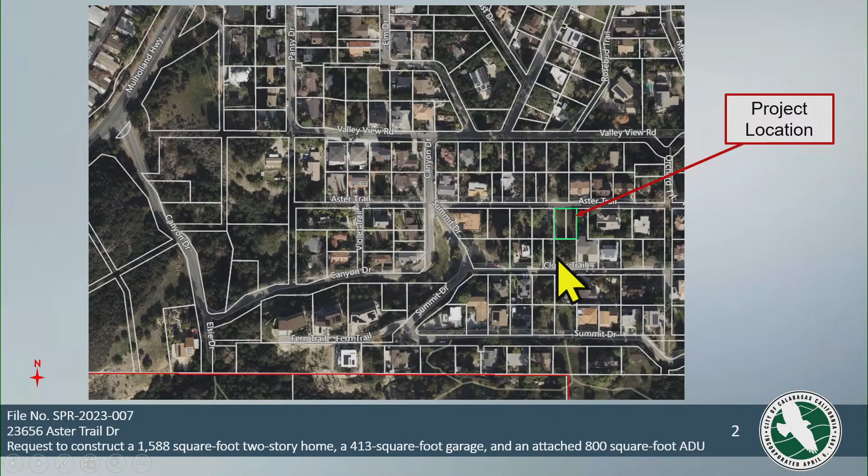The project site is a vacant lot located in the Highlands along Mulholland Highway, as you can see in the overhead image. The site is surrounded to the north, south, east, and west by other single-family residences. I'd also like to point out that there is a vacant lot directly above the project site on Clover Trail. I'll hover over that so you can all see it here. This parcel right above is also a vacant site.

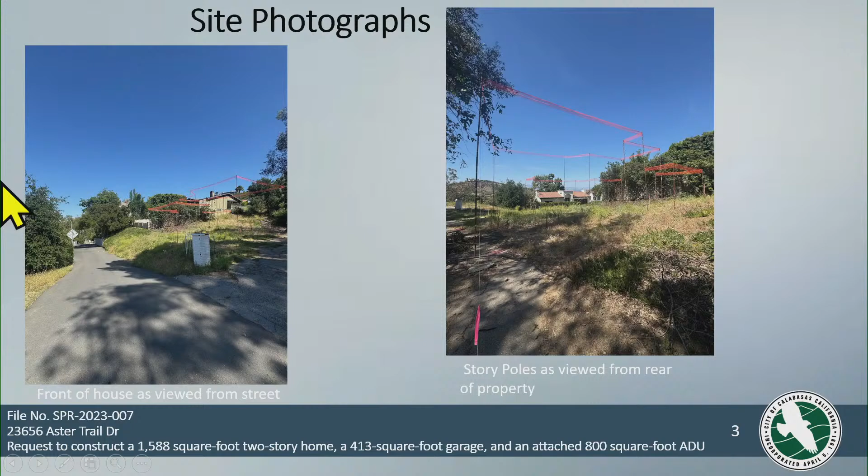The project was deemed complete on October 16th, 2025, and was subsequently noticed for the November 20th Planning Commission hearing, where staff reports and plans were shared with the planning commissioners. At that hearing, the commission opened the public hearing to comments to hear neighbors' concerns about the project and continued the item to a date uncertain so these concerns could be addressed. Over the past few months, the applicant has worked to revise and update the site plan, the grading plans, and the hydrology report that address those concerns raised by both staff and nearby residents.

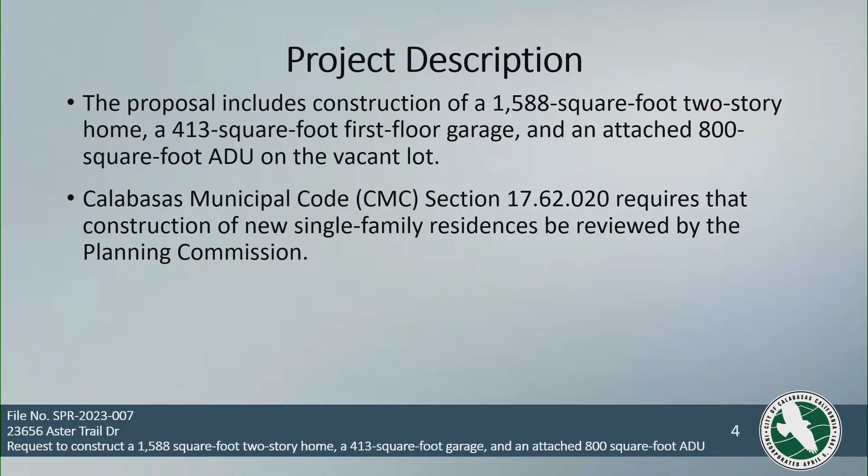As mentioned, the site is a vacant property comprised of 2 separate tax identification parcels. However, staff has confirmed through review of the title report that the subject property is one legal lot. The parcel, as shown earlier, has sloping topography, so there is a low point at the street, and as you go south the hill starts to rise. There are existing drainage features on site.

There is a catch basin that exists on site right now. There is also a drain pipe that will be rerouted, proposed to be done by the applicant. This currently comes from Clover Trail and is basically the drainage along Clover Trail that goes down to that catch basin. The applicant is proposing to reroute that pipe, which I'll cover in a slide a little later.

Let me interrupt for a second. Can you give me an idea of the size of that catch basin, either in linear footage, area, or maybe capacity? It looks like it's a couple feet wide. We'll hear from the applicant perhaps on that. Yeah, they could provide more information, but I'm seeing it on a map right now, and it's about 2 feet by 3 feet wide. Okay, thank you.

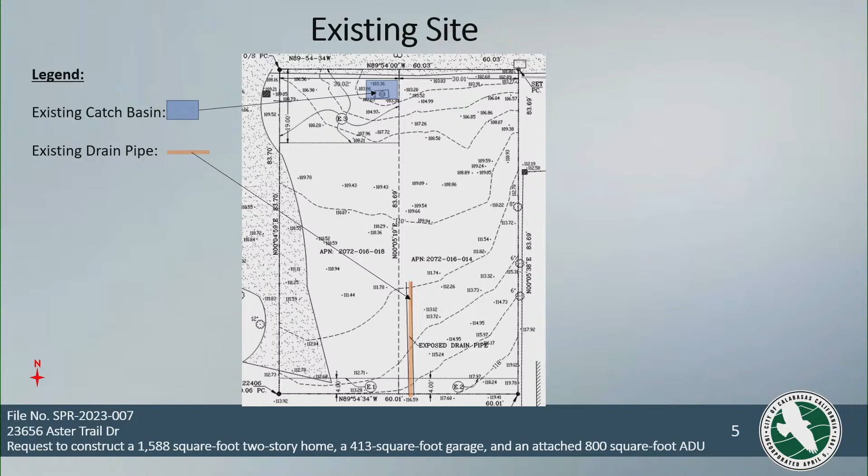The project complies with all development standards, including FAR, height, and front, rear, and east setbacks. Per state law, the accessory dwelling unit cannot be counted towards the city's FAR requirement. The ADU also has reduced rear and side yard setbacks at 5 feet 2 inches and 9 feet 5 inches respectively, also consistent with state law provisions.

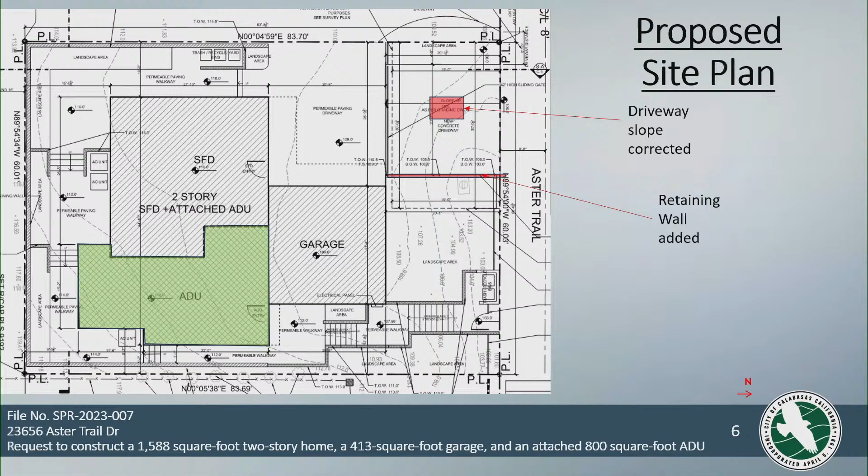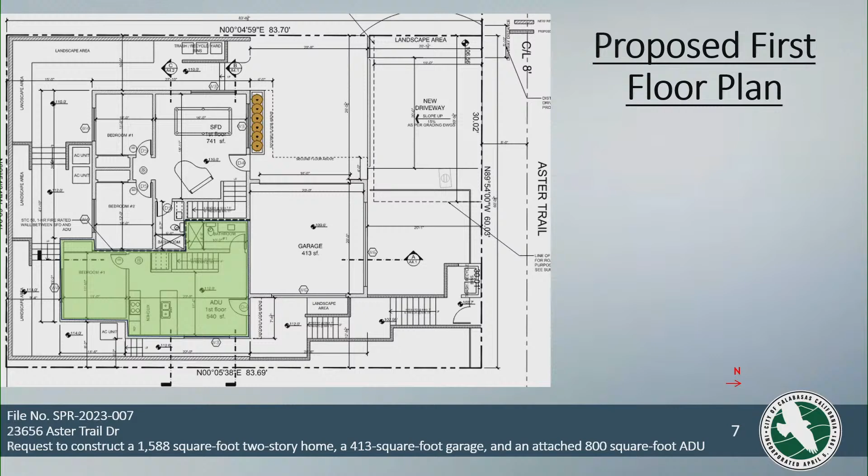Onto the proposed first floor plan: there's a garage, living room, and 2 bedrooms, 741 square feet in size. The first floor of the ADU includes a kitchen and bedroom and is 540 square feet. The second floor includes 2 bedrooms, a kitchen, and dining area, and is 847 square feet. The second floor of the ADU includes a bedroom and bathroom comprised of 260 square feet, and there's also a balcony off that ADU that you can see here.

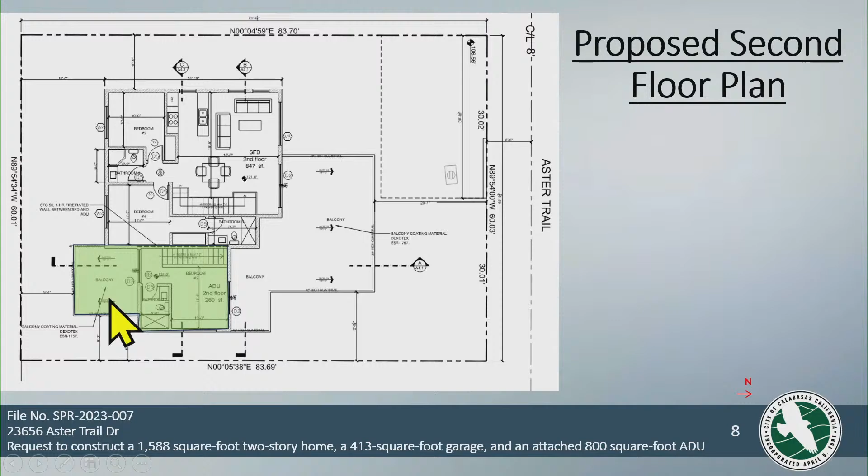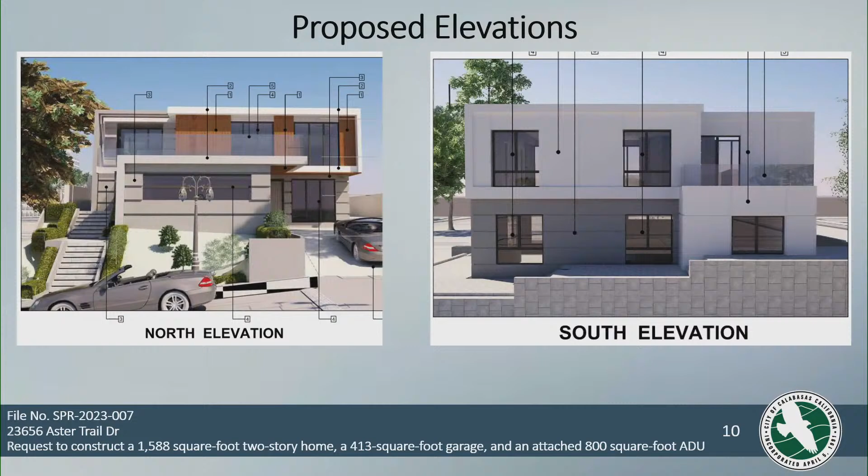Here are some proposed elevations, from the north and the south. Please ignore the decorative lighting element that is not included in the plans—that was probably just done with the rendering software. Same with the cars, of course.

Here is the east and west elevations. You can see the sides here. This is the ADU basically on the side here, and then the west you're looking at the garage.

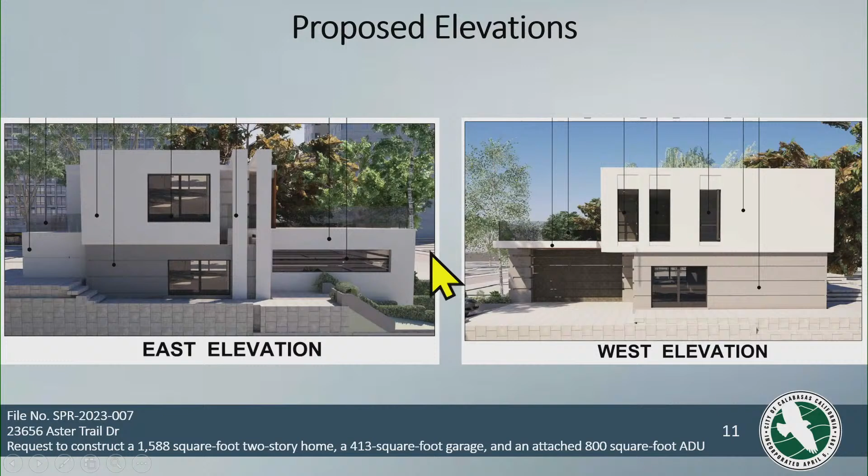Colors, materials boards—I'll quickly go over this one as I just mentioned those on the renderings.

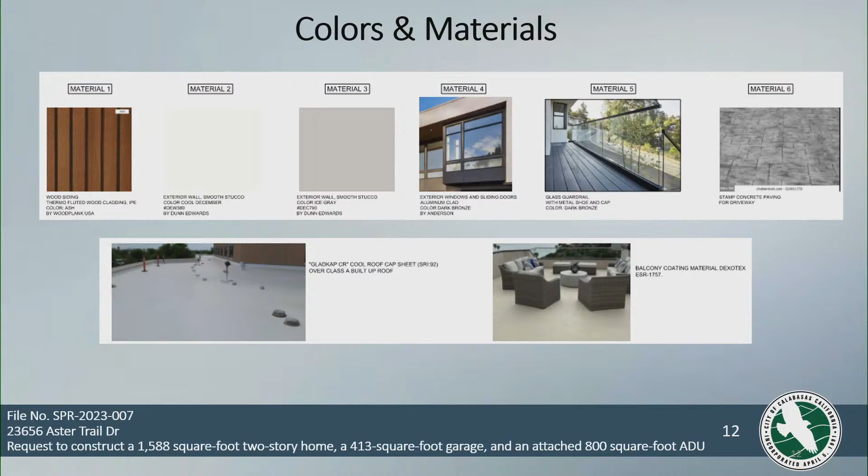The ARP reviewed the project initially on August 23rd, 2024. They had questions about the garage orientation. They were concerned with accessibility and safety due to the hill along the street on Aster Trail.

On September 27th, 2024, the ARP reviewed the project again, where they complimented the garage design and minimalized driveway slope, and also provided a safety turnaround radius where vehicles could enter Aster Trail facing forward, which I'll cover in a slide shortly.

Other than that, the ARP found that the proposed project is compatible with the aesthetics of the surrounding neighborhood and recommended approval to the Planning Commission.

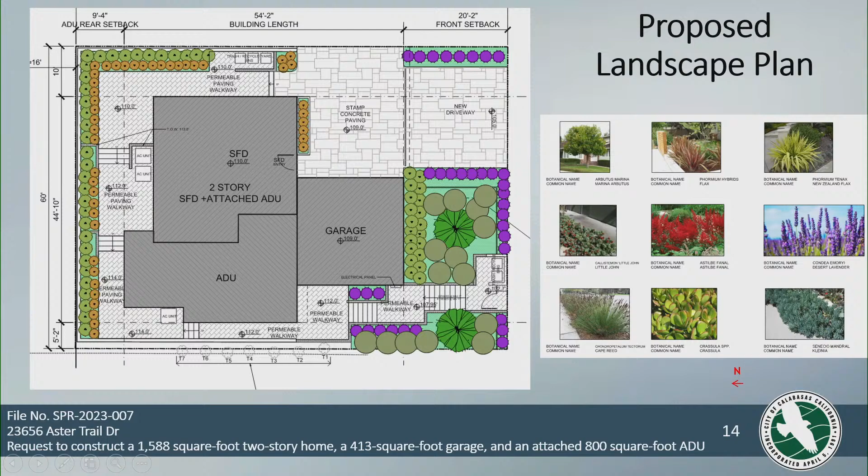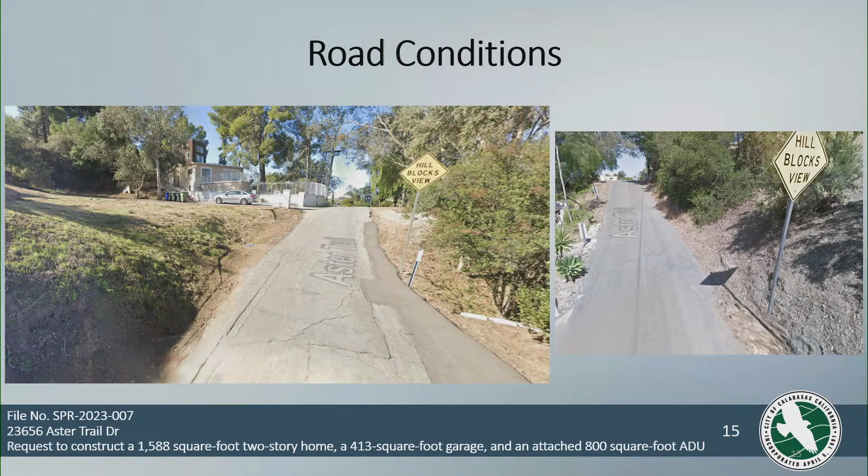As mentioned in the staff report as well, there may be a required safety railing. Once that gets to building and safety, that's typically something that is addressed.

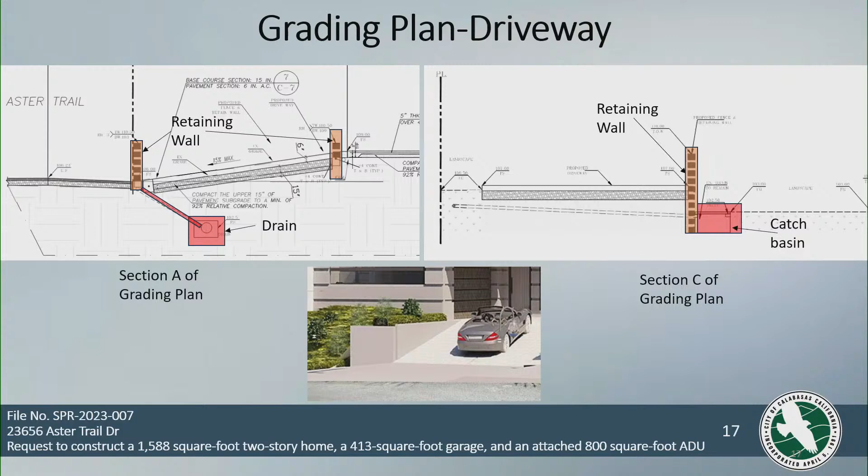As mentioned, Public Works confirmed that the applicant is proposing to reroute that 10-inch pipe that conveys water from the street above. The hydrology report was also updated and reviewed by Public Works to confirm that this catch basin has excess capacity, and that runoff to the catch basin on site would only increase 5% during a 50-year, 24-hour rainfall event. Thus, runoff from this project site will not adversely affect downstream properties.

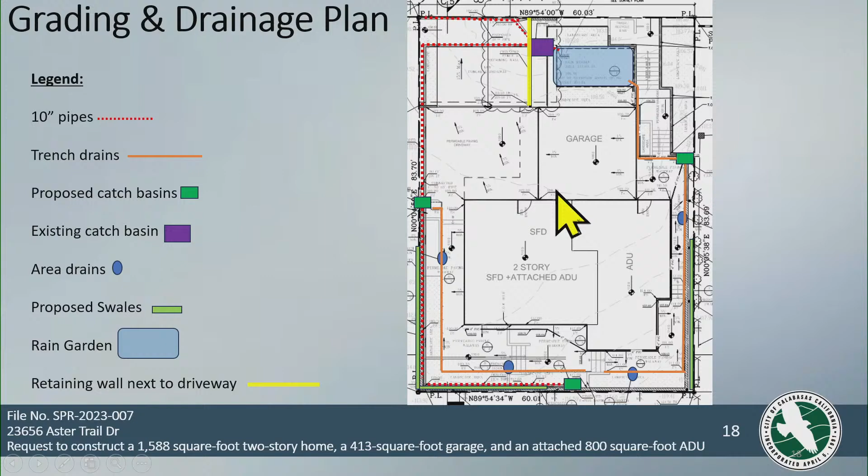It's also important to mention that this parcel, as currently undeveloped, allows water to sheet flow down that hill directly to the neighboring properties. Overall, we expect this drainage plan should actually improve conditions for downstream properties, as it would slow down some of that water that would typically just sheet flow down. Now water will be kept mostly on this side of the property and directed to that rain garden.

Looking at the home size comparison, this information comes from the home comparison table within the technical appendix of the staff report. This looks at homes within a 300-foot radius of the subject site, and this data comes from the LA County Assessor. This data does not include garages.

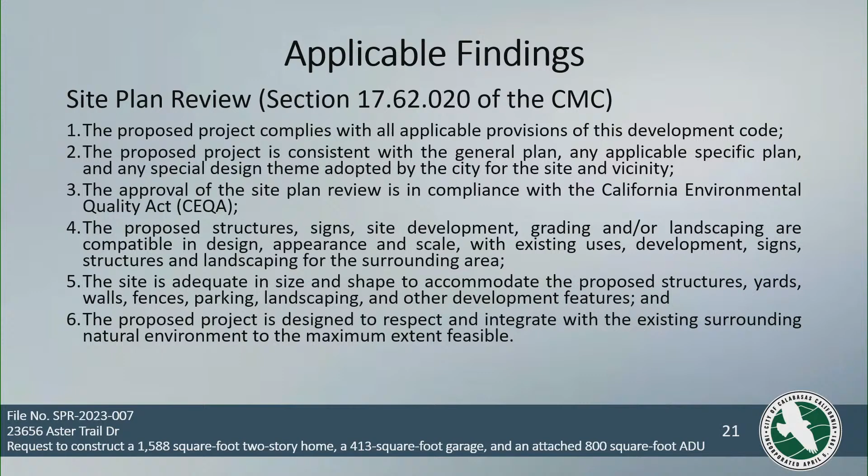And with that, to staff conclusions: the proposed single-family residence is an allowed use in the rural community zoning district in the Calabasas Highlands Overlay Zone. The proposed project conforms to the development standards of the rural community zoning district and Calabasas Highlands Overlay Zone.

Homes in the neighborhood range in size from 1,026 square feet to 4,288 square feet, and the proposed home is 1,588 square feet. The ARP recommended approval of the project. And lastly, the project is exempt from CEQA review pursuant to section 15061, the general rule exemption, and section 15303, new construction, of the CEQA guidelines.

So staff is prepared to assist the commission in developing the findings for approval or denial as required. Thank you, I'm available for any questions.

Are there any questions or requests for additional input? I'd like to hear from the applicant or whatever speakers you have. Bob? Yes, I have some questions for staff.

The driveway orientation, that was done because of the safety issue. That's correct, Commissioner Leo. The driveway orientation was done purposefully so that when the project was initially submitted, there would have been a straight driveway going up to a garage, which would have meant that if someone was backing out of their driveway, they'd be backing out with no visibility potentially as they exit the property.

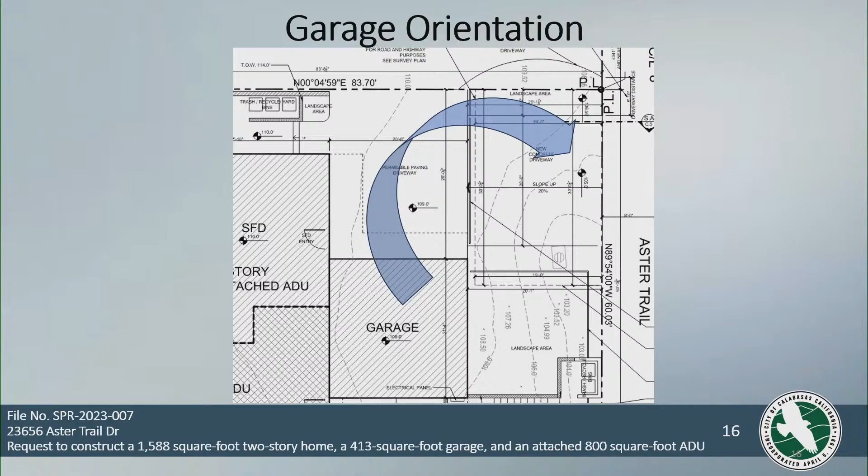I understand that, and I don't know, as I say, if there's anything we can do, but it is a safety issue for visitors and delivery people who will probably try to back out and not think about trying to turn around. I don't know, could any signage be required at the driveway saying don't back out, make a turn and go out front forwards? Is that conceivable, or do we just ride with the risk?

I think if you believe that's necessary to make one of the findings to approve the site plan, then that could certainly be considered an additional condition. Obviously there was a danger, that's why the driveway was changed, and perhaps signage should be required.

What about, as an alternative, requiring one of those mirrors that allow for wide visibility, like a 360 degree view? That could work. I don't know, it's a safety issue.

But it was raised, the driveway was changed because of the safety concerns. And while that may be great for the owner, it may not be so great for other people who are not aware of that situation. It's a thought, Commissioner Leah, my recommendation is that has been raised.

We're now moving into more of a deliberation type discussion, so perhaps we could wait till then. We're just questioning staff at this point. Yeah, we're on the reportage. All right, if I can jump to the water issue.

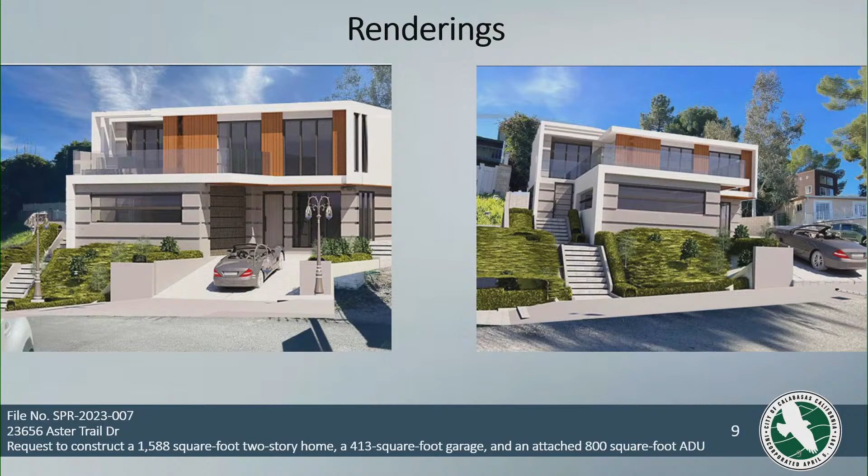At this point I would open the public hearing if John will tell me that's okay. Is that right? That is okay. Okay, so I'm going to open the public hearing, and I have two speaker cards.

One's from Marley Temper, I believe, and another is Rich, is it Perilou? The first card in the pile is Marley. You want to speak? If you'd give us your name and your place of residence, that's all you have to tell us, and you have 3 minutes to give us your comments.

My name is Marley Temple. I live in Encino. I own 3 lots that are vacant next to my neighbor here, and it's kind of opposite the applicant. My main concern, like last time, is the street. It's too narrow, it's dangerous. I'm very concerned. I brought it up before that I think it's a good suggestion to make it a one-way street, and I haven't followed up because I was being told I would have to go to all the neighbors and collect signatures, but that's when I then stopped in November because I didn't have the time.

I have concerns about the parking in general, especially when there's construction going on. I haven't seen anywhere in the rendering where the concrete truck will park. It's a very narrow street. I'm there weekly. The FedEx truck comes from one side, and he can't move anywhere when he's especially in front of the regular homes. So it comes to a standstill pretty easily, except they like to park on the lot that I own. I don't have a big problem, but my liability if a big truck comes becomes too high for me.